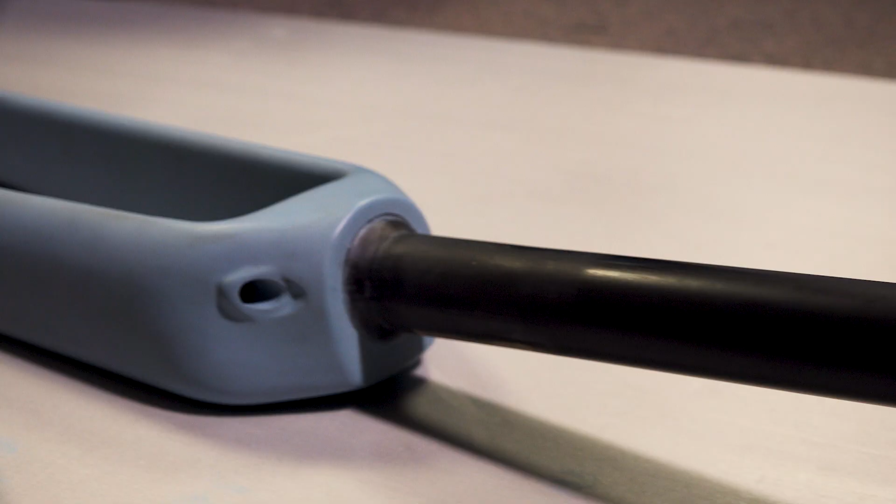Yes. Again. Hey everyone. So several months ago, I was in a bike accident. I got doored on my way into work. My bike had a carbon fiber fork, and I was a little concerned that there might be some damage inside the fork that I couldn't see that would make it unsafe for me to ride. This got me thinking a little bit about a more broad question, and that is just how safe is carbon fiber to be used for the front forks of bikes, particularly commuter bikes like mine.

Carbon fiber, or carbon fiber reinforced polymer, like I've got here, can sustain some damage. Here's another one, a tube. Say I squeeze this, you might hear it on the microphone. Can you hear that little cracking? Right? So there's actually little bits of fracture that are developing inside, and I can't see from the outside that fracture has occurred. I know there's actually a crack that runs right along here, but I can't see it from the outside.

Those fractures can occur as fibers fracturing, the matrix can fracture. You can actually get fibers pulling out from the matrix, although that's a little bit less common. They can also occur as delaminations, where plies separate like that. Those things can all lead to a decrease in the load-bearing cross-sectional area, and that can decrease the load that the part can support.

What I'm particularly interested in is the development of a crack, or the potential for a crack, that gets close to the critical crack length. That could lead to a sudden and complete or catastrophic fracture of the front fork of my bike, which would be devastating. So I'd like to see if my carbon fiber fork developed any internal damage during the accident that would make it unsafe to continue riding.

But what I'd love to do is actually look inside without having to section this up. And so CT scanning is a great way to do that. My friend Charlie helped get us in touch with the great folks at Lumafield, and they were kind enough to offer to scan my fork. And so we're going to take a look inside this using a CT scan and look for any damage.

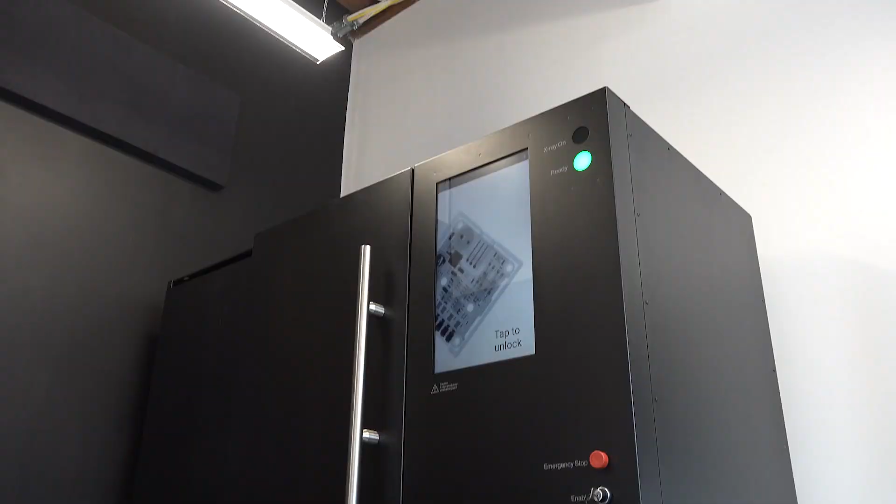All right, so we're here in Cambridge, Massachusetts at Lumafield, where they've got these beautiful industrial CT scanners. And so they were good enough to scan my fork, and we're gonna be taking a look at it today inside the fork, see if we can see some evidence of damage that could have originated during the accident.

Hi. Hi, Scott. Hi, Sarah. Nice to meet you. I'm Charlie. Hi, nice to meet you. Thanks so much for having us. Yeah, of course. Yeah, come inside.

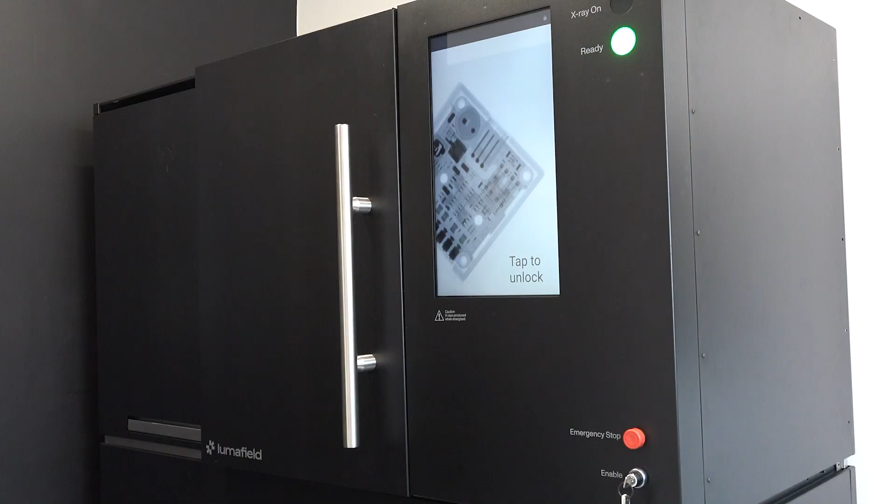Awesome. Could you tell us a little bit about Lumafield? It's a fairly young company, right? We were founded about 4.5, almost 5 years ago now, really revolutionizing manufacturing and how we think about manufacturing. It's really powerful to be able to see inside your parts, but it's really hard to do that. Yeah. CT is a technology that's been around for decades. So you've probably heard of medical CT scanning. In fact, I had a CT scan done of my head after the accident.

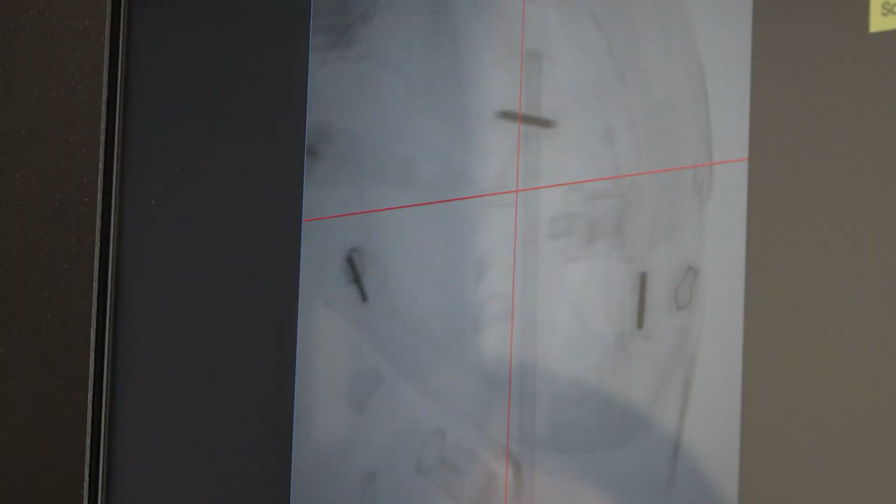It's based on X-ray radiation being able to penetrate through a lot of different material. So we can shine X-ray through an object. We can get different intensities depending on how much material has been passed through and its atomic number. Higher atomic numbers tend to attenuate X-ray radiation more. Going through more material attenuates the radiation, so you get different intensities coming to the detector depending on how much material is passed through. We can rotate the sample around like that and develop a beautiful solid model of the part and the internal features.

And Lumafield has done a fantastic job on the software side of things, especially presenting that in a really beautiful way. So there's actually a lot of really interesting science behind CT scanning. A lot of it we talk about in my lectures, and I talk about it in some of my other videos.

So for example, the generation of the X-rays: we take a heated cathode, heat it up, put a voltage, usually for CT it's in the range of 100 to 150 kilovolts, and we get these electrons that come off of the cathode and they're accelerated over towards this tungsten anode. They hit the anode and a bunch of radiation is generated in the X-ray range of the spectrum.

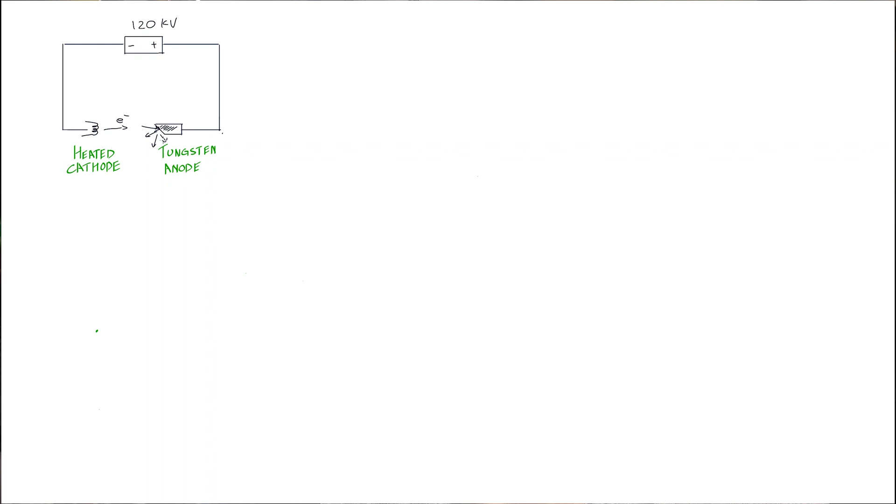So how does that happen? Well, like we've talked about before, there's a few different ways. One, those projectile electrons, as they're called, can knock an electron out, and as you know, there'll be a subsequent filling of that electron and a characteristic emission of radiation. It's what we talked about in X-ray diffraction, copper K alpha, well-defined wavelength.

The majority of the radiation in CT scanning is not from that, but it's from the projectile electron interacting with the nucleus. The nucleus is positive, the electron, as you know, is negative, and so it's decelerated as it comes close to the nucleus. And that also releases some radiation.

Now this radiation is called bremsstrahlung. It's a bit of a mouthful, and I apologize, I may have mispronounced that. That means braking radiation. It's as if you're hitting the brakes, so it's slowing down, it's decelerating, and there's an emission of radiation that comes from that. Now that is a range of wavelengths, and that can pose a bit of a challenge for us later on.

And the other thing that's interesting is that this process is pretty inefficient. Really, we only get less than a percent of the energy out as X-rays. And so most of it comes out as heat, and that's one reason why tungsten makes a good anode. It's got a high melting temperature, and we need to also cool this. So cooling is really important in CT scanning.

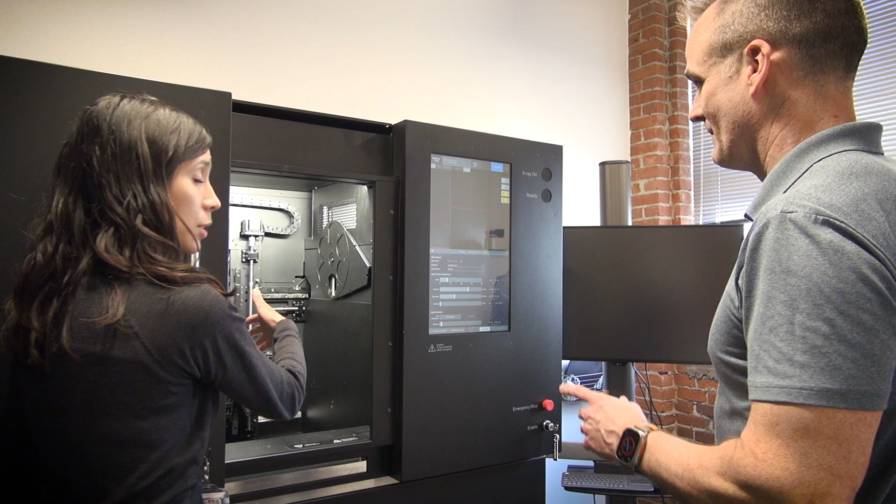Yeah, definitely. This is our Neptune scanner. We have 3 different versions, and they differ in the source and the detector that are in there, but they're all based on the same basic platform. We have a source on this end, and the motion stage here, so you can position your part and then rotate it when we're doing the scan, and then the detector's over here, so we're capturing the 2D images that result. I'm really excited to see the fork and see if there is any damage. But first, I guess we might be able to scan my helmet.

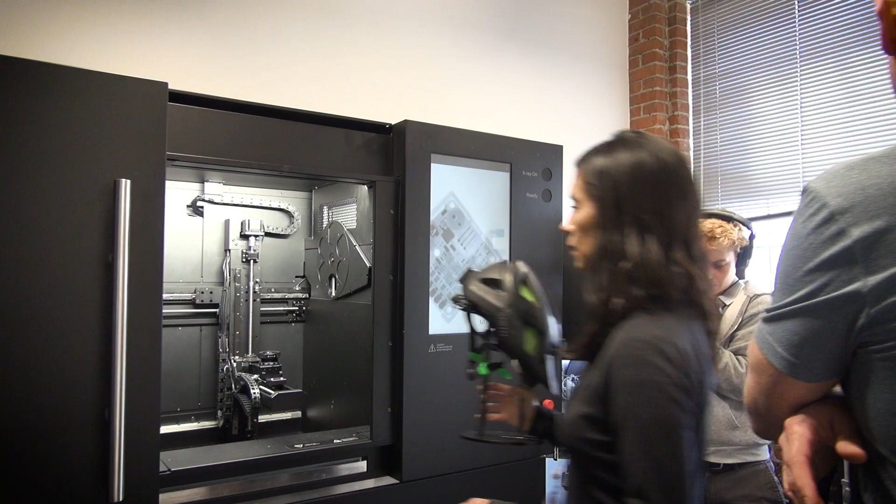We scan the 2 sides of the dropout, 2 sides of the crown. This is our software Voyager. We've got a lot of tools on the top side, and then on the right hand side we've got some view settings. We can look at it in different color schemes.

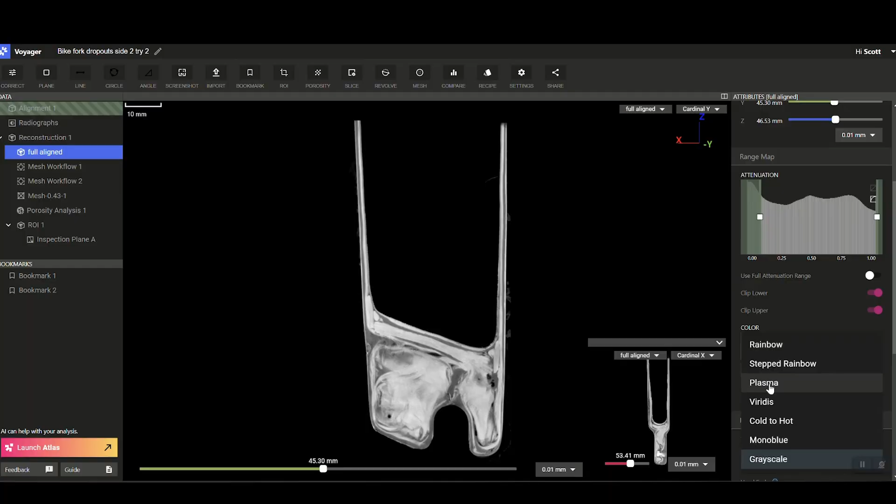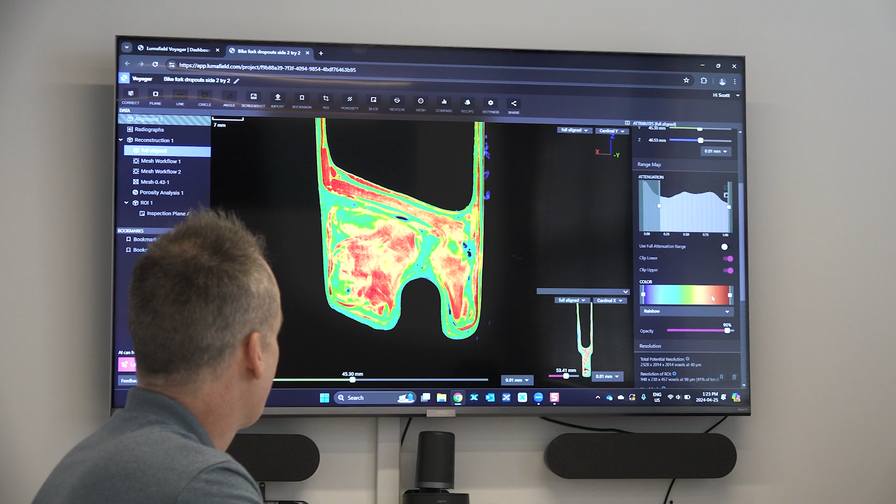The colors are showing relative density, and so you can see in the legend here, the dark blue up to the lighter blues are the least dense materials, and then as you get into the reds, those are the most dense materials. It looks like very localized dark blue regions, like just there, right? Exactly, yeah. So these could either be air pockets, or they could be just regions of not dense material. So I'm really interested in looking at this region of the fork.

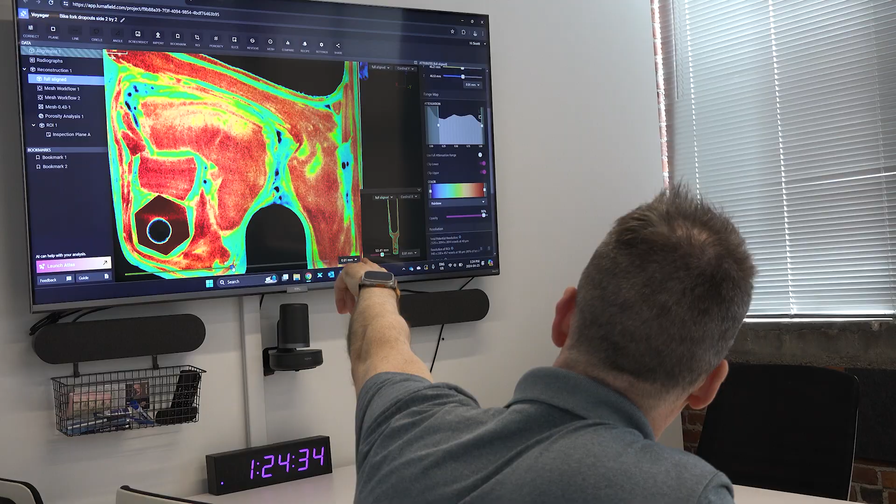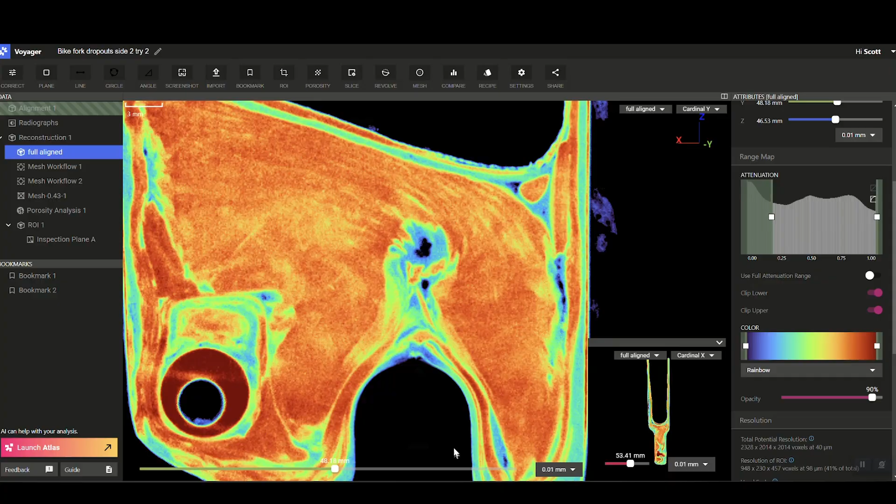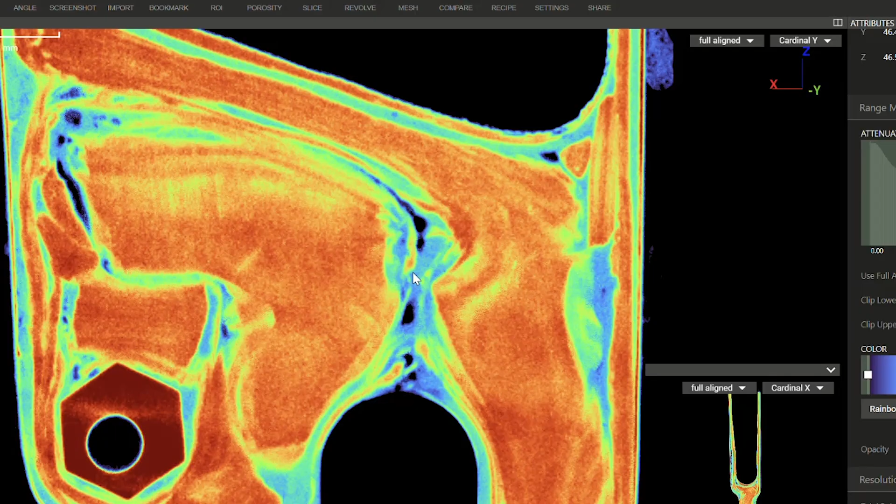Now in this scan of my fork, it looks like there's several voids that are lined up along this fold in the fabric. Near the axle itself, it looks like there's been a crack that could have originated in the accident. I'm concerned that a small amount of riding could cause fracture of the final portions of the matrix that are still holding this thing together, leading to a pretty long crack that could be close to the critical crack length. And I think you showed me before there might be a way to measure that.

Yeah. So this is about 1 centimeter. Yeah, about 1 centimeter. So definitely that would be something that would be concerning to me. So how long a crack do we need to be worried about? That's a really great question.

From fracture mechanics, we know that we can relate the stress to the crack length through this material property, the fracture toughness. What we need then is to estimate what the stress is and find a good value for fracture toughness for carbon fiber, and then we should be able to determine the crack length. The fracture strength of carbon fiber varies really substantially, but let's just take a reasonable value. We'll take 500 megapascals for the fracture strength of carbon fiber.

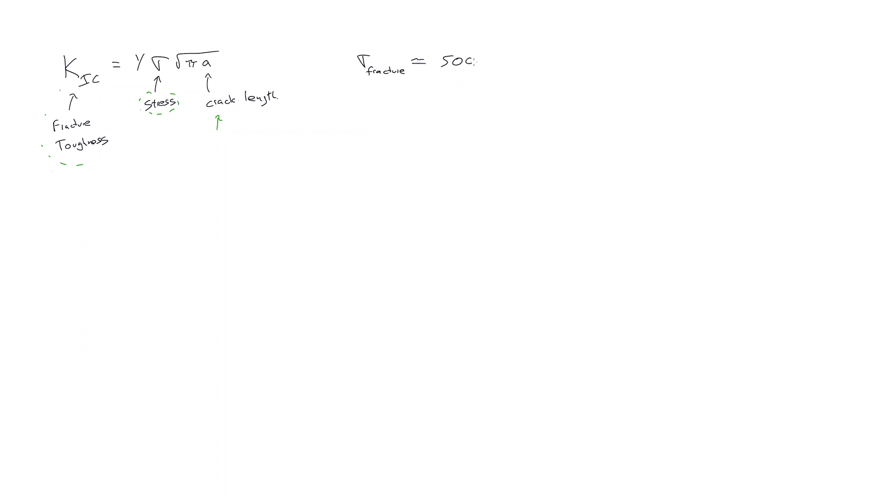If we're designing a commuter bike, you're facing a lot of pressure to keep the mass low, but you don't want to go overboard, make it so low that it's dangerous. At the same time, you don't want to go overboard the other way and over-design it and have it too massive. So how do you balance the amount of material, the costs, and the shipping costs and everything with safety? So engineers do that through a safety factor.

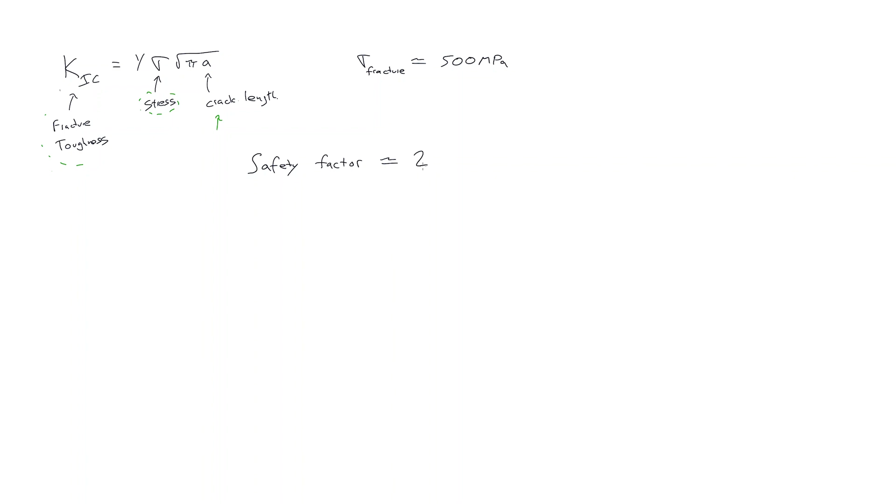So for a commuter bike, let's say we're being safe, there's probably a safety factor of around 2. So that would then lead us to say, okay, the service load is probably going to be around 250 megapascals. If we expect that in typical use, the bike would see a maximum of 250 megapascals in some portion of the fork, we could load it up to 500 before it would fracture, right? 500 is the fracture strength. So that's a safety factor of 2.

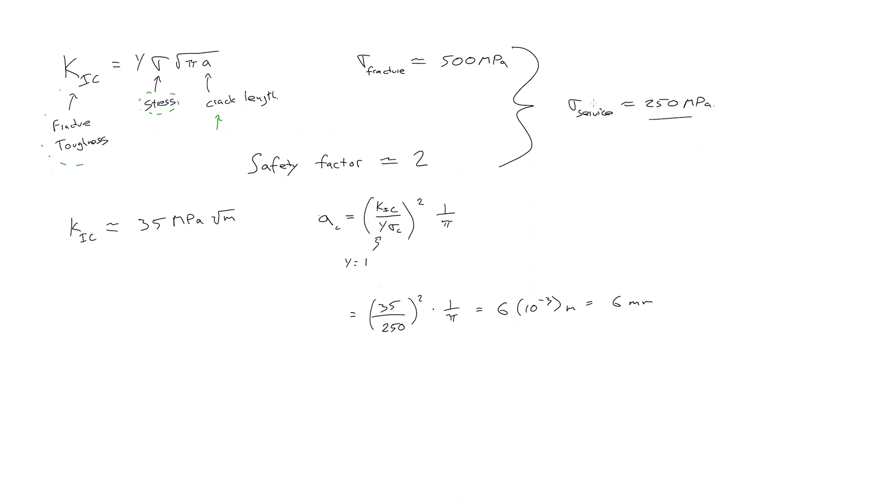The fracture toughness, let's just take a conservative, reasonable estimate here, 35 megapascal root meters. From that, we should be able to calculate the critical crack length, around 6 millimeters. We're going to be concerned with cracks that are around that 1 centimeter range.

I replaced my fork with a steel fork. Truthfully, I was never really that comfortable riding a carbon fiber fork. Personally, I'd like to see every manufacturer of a carbon fiber component using a CT scan to validate that their design choices are actually reflected in the part that's made. I don't know if that's the case here. I was a little concerned with the way some of the plies were oriented.

It would also be great to see CT scanning used to validate that parts are safe for people to continue using after an accident. End of the day, I guess the conclusion really is, if you ride a carbon fiber front fork, please be careful. Inspect it after a bump or an accident, and ride safe.

So, hey, do you think there's a problem with this fork? Yes, obviously, it was in an accident. A friend of mine, Matt, was in an accident, and clearly there's damage to this limb here. But the intact limb was actually really interesting to look at. There's a tiny little feature there that you probably can't see on the camera. It almost looks like a wrinkle.

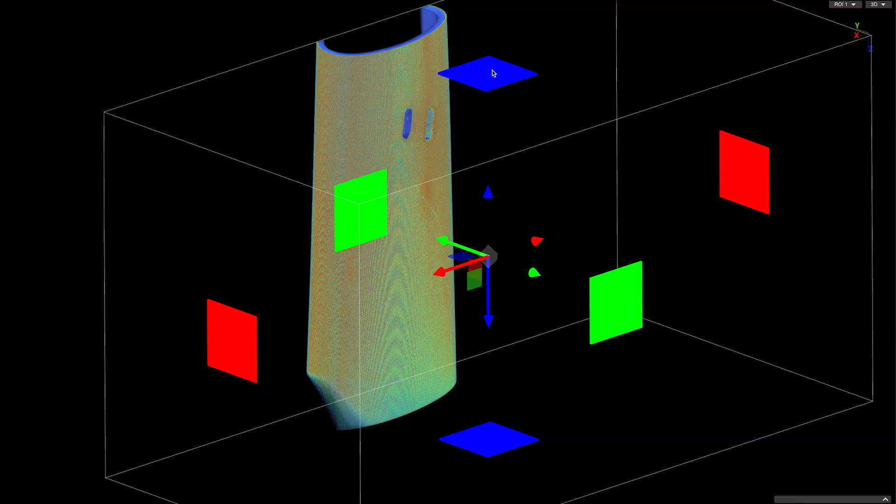And we can see that there's a little crack propagating between the plies from the surface, right through the plies, and then propagating along between the plies, a distance inside the fork, almost going right to the interior surface. So bear in mind, this crack, which is pretty significant, is barely visible from the surface.